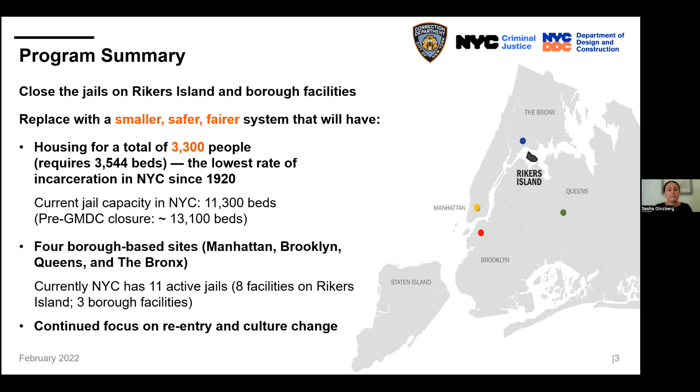And also that these facilities can be civic assets for the communities in which they're located. So now we'll zoom into specifically the Bronx site and what's happening with this particular project.

The RFQ, the request for qualifications to find the design build team to do the site preparation work, was released in October of 2020. Then we released the RFP to narrow our selection down to one design build team in March of 2021. That design build team, who is here with us tonight, Yonkers Contracting Company, received their notice to proceed in December of last year, so they've just recently kicked off.

The RFQ to find the design build team for the future contract, the new facility that will be constructed, is actually part of a separate contract.

That RFQ went out in September of this past year, and the RFP, the request for proposals, to narrow down the selection to one design build team, will be going out in the third quarter of 2022. We do expect that the selected design build team for the new construction will receive their notice to proceed in the fourth quarter of 2023.

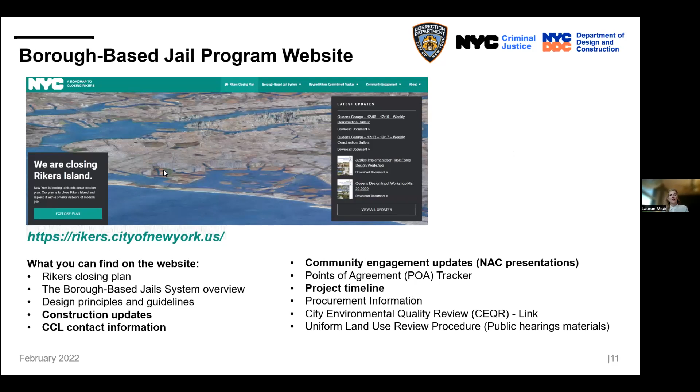The CCL contact information will be available as soon as that's updated and the person has started. At this point, I will hand it over to Glenn from Yonkers Contracting Company.

This is, again, the design builder who has the contract to do the site preparation work, separate from the new facility construction, which will happen in the future. He'll walk you through some of the key information you need to know about the process today. So with that, Glenn, I'll turn it over to you.

Thanks. All right, thank you, Lauren. My name is Glenn Olechnowich. I'm the project executive for Yonkers Contracting. On the line also is Jack Donnelly, who will be the on-site project manager for Yonkers Contracting.

What we'd like to talk about today is the project itself. We're going to go through three main items: the schedule milestones, basically when the work will take place; the site preparation and temporary sewer overview, covering the work that's going to happen on the job site; and the last item, the measures we will put in place regarding traffic, air, noise, dust, and vibration mitigation and monitoring.

So, schedule milestones: note that these dates shown are based on what we know right now and are subject to change based on permits and other outside influences. Right now we have the NYPD vacating the tow pound area in February.

Once they vacate, we'll start our site investigations, which include assessments and surveys, borings, test pits, removing trailers, and tree removal around the site. That's going to happen in the February, March timeframe. After that is completed, we'll mobilize onto the site and put in the site fencing as required.

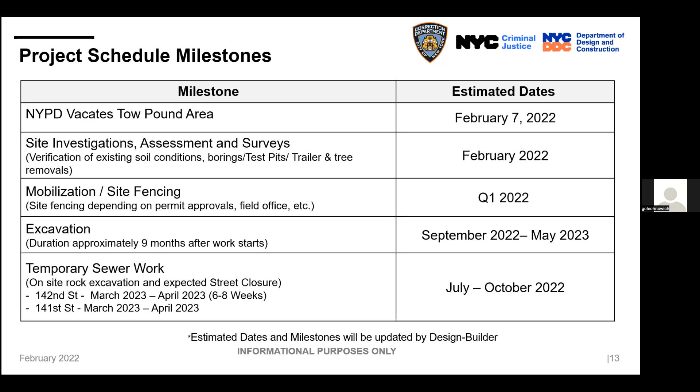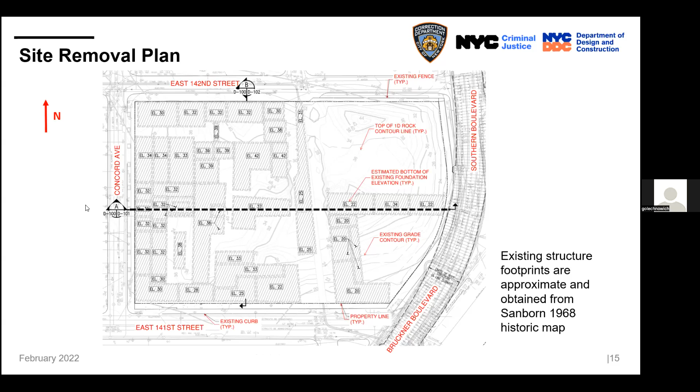This excavation includes the demolished buildings and the soil that's on site. Going through the hashed areas, those are the existing foundations we believe are going to be in place that we're going to have to demolish and also get off site. We expect there to be roughly 90,000 cubic yards of material to be taken off the site.

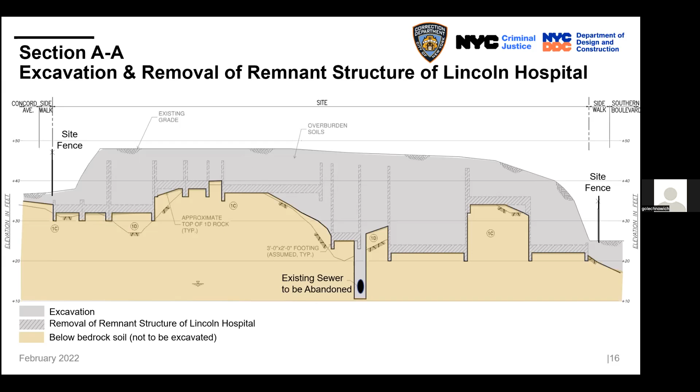So when we start the work in the site investigation, which is the first thing we'll be doing out there, as a precaution we're going to wear level 3 PPE, which is Tyvek suits, and people will have on respirators. That's to protect our workers during the initial site investigation, until we know exactly what's out there.

So there will be no issues with the public. We'll be monitoring to make sure the public's safe along with our workforce. So if you see that out there, that's just out of an abundance of caution wearing these suits. Once we identify what's out there, then we'll decide what needs to be done to protect not just our employees, but also the surrounding public.

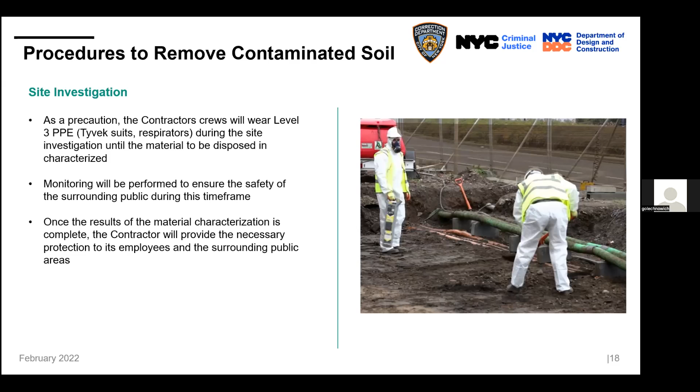We know traffic's a big issue on this site, because there's going to be 30 trucks coming in and out of that site on a daily basis when we're excavating. We're going to make sure our trucks stay to the haul route. Our trucks will, when coming off of I-87, get off exit 1, turn down onto 132nd Street, then follow all the way over to 141st, and enter the site at the southeast corner where we will create an access way. That'll be the only way people are going in and out of the site, to keep people away from the Concord Avenue residential area.

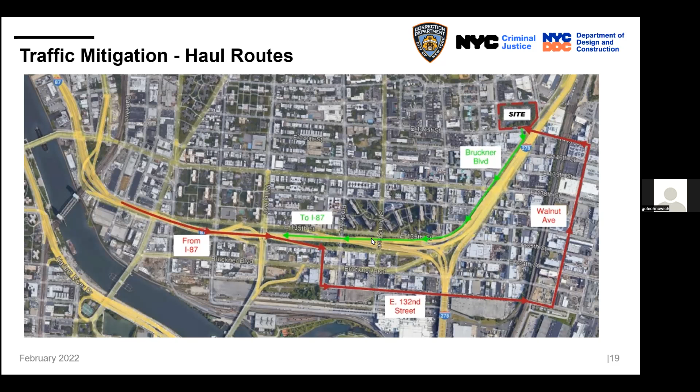So I'm going to talk about the phasing or staging on the project. I'm not going to focus on the dates, since that could be subject to change, but I'm going to talk about what each stage looks like and what's going to be done in each stage.

So the pre-construction phase, the main goals are really, like I discussed before, to identify the soil material. That'll be done through borings and test pits, inside the site and also outside the site, mostly along the sidewalk. During this work, there will be short-term sidewalk closures and parking restrictions in the areas we will work.

We'll work in one area and work our way around the site, so it won't be full closures or full parking restrictions, just partial. We'll also demo the existing trailers that are on site that the NYPD has, and we'll install measures to keep all of the stormwater on site during excavation.

So stage one, this is when the actual work gets started. Before we do anything, we're going to make sure we install all our noise, dust, and vibration monitoring. These are all engineered devices to protect our workers and also the surrounding public.

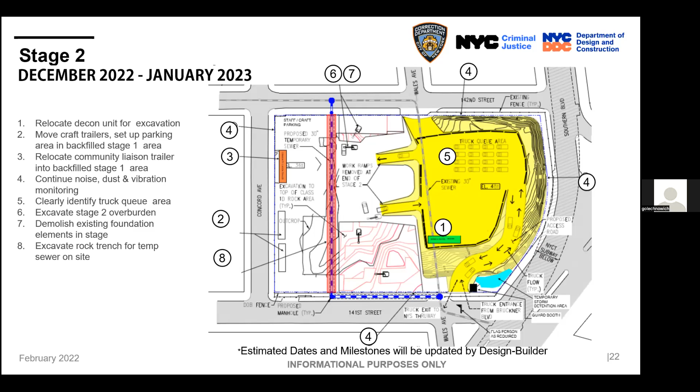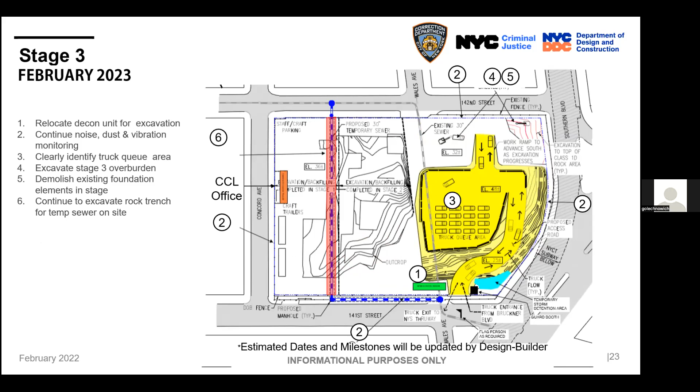Stage 3, again we're going to continue working east, and we're going to excavate the site out and the building material, and then continue to excavate the rock trench for the temporary sewer. Stage 4, the last stage for the excavation, we'll finish the site excavation and complete the rock excavation for the temporary sewer.

And up on the top of the screen, number 6, we're going to start the temporary sewer work on 142nd Street. This is going to require a detour of 142nd Street between Wales and Concord Ave, so we will detour that area.

The pedestrians will be able to go on the north sidewalk on 142nd, but the south sidewalk will be closed and the roadway will be closed. We will work with the DOT to put together plans for detours.

On 141st Street on the south side of the project, a sewer is going in close to the existing property line. So we will reroute pedestrians outside of our work zone out into the street, but we'll have barriers to protect them so they can walk safely in that area.

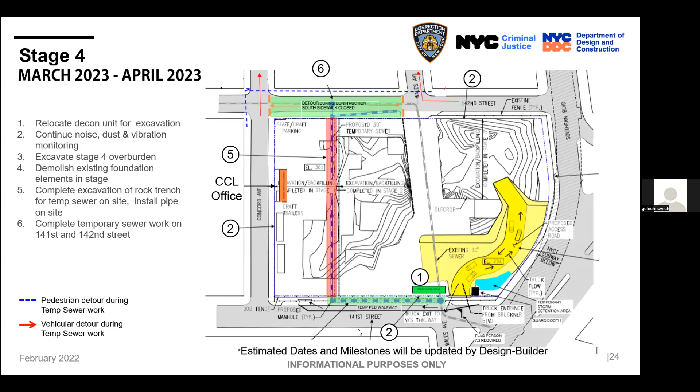There's enough room to have two-way traffic on 141st Street and also have parking along 141st Street on the south side. So all of the sewer work will be completed in that stage.

So in the substantial completion stage, which is stage 5, we'll be repairing all of the street, restoring any pavement that was damaged or any sidewalks that are damaged. And we'll be retiring the existing sewer that runs through the site and put the new temporary sewer into service.

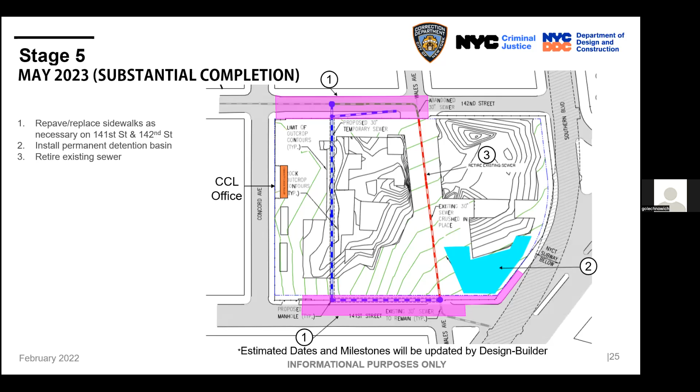Last, we will demobilize from the site. The community liaison will stay on site, and we will create a permanent detention basin for runoff, if there's a lag in between projects, as a place for the runoff to go, be treated, and put off site as required.

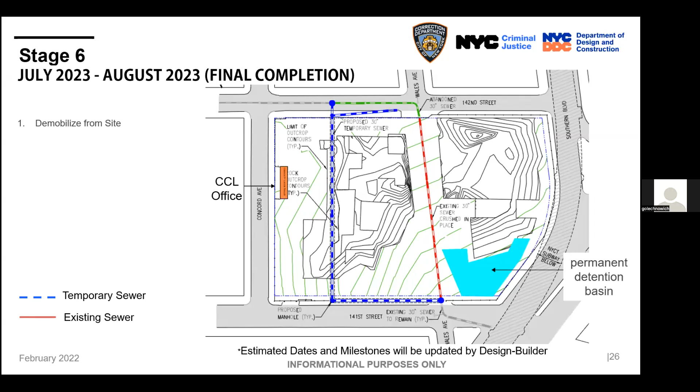The other thing we want to talk about is the measures we're going to take to mitigate traffic, dust, noise, and vibrations. All construction vehicles, personnel vehicles, and trucks will be staged on site at all times. The site is big enough to house all of the vehicles, so we will not have any on the surrounding public streets. We're going to create a single entrance for construction vehicles at the southeast corner of the site, at 141st and Bruckner, to keep construction vehicles away from the residential areas.

We will have real-time air quality monitoring throughout the project. Whenever we're working, we'll be monitoring the air quality, and this will be real time, so we'll know what we're getting at all times.

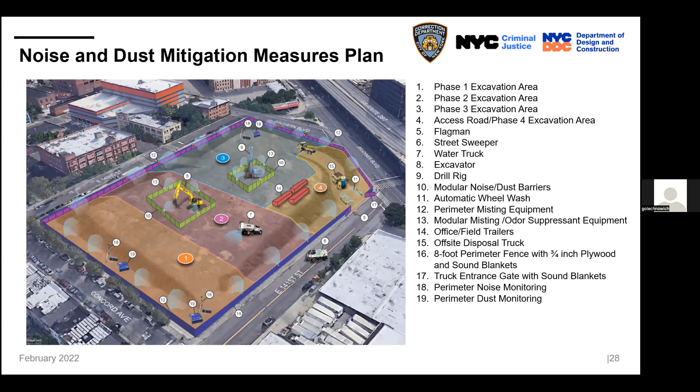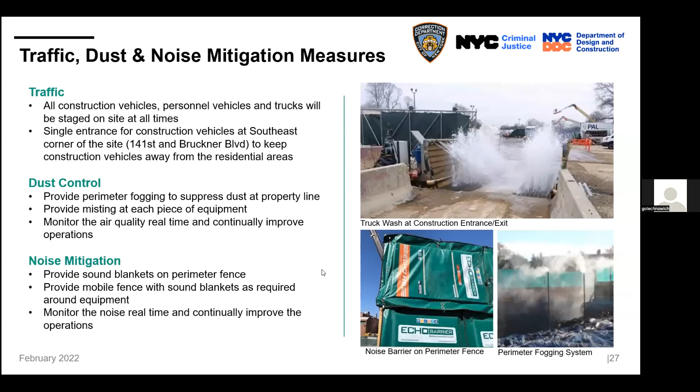It's going to be short term, we have a couple of weeks of doing borings along that area. So that side of the street will be taking the sidewalk, and we'll have to limit parking as we work our way down the street. We won't have to take the entire street parking and sidewalk, probably most of the sidewalk, but for parking we'll be able to have some out there, just not all of it. Glenn, do you mean the east side of the street? Oh sorry, you're right, east side. Does that answer the question?

Thanks, Glenn, thanks for the information. The next question is also for you. How is vermin going to be controlled? As the community has seen with other projects in this area, when construction starts it kind of creates a migration of rats. What are you and your team going to do about that?

Great question. We have a rodent control process that's going to be in place. We're going to set up to 100 traps throughout the site, and we have a subcontractor who will take care of that. This process gets approved by the DDC, but we do have a process that will control the rodents in the area.

Okay, thank you. Next question: can you explain again why we are doing the site preparation and demolition from west to east, and not the other way around? Okay, that's actually another good question.

So this is a twofold reason. One is because we created our site access on the east side of the project to keep all of our construction equipment away from the residential area. We want to keep this area up on top on the east side to queue trucks and for staff parking, and work our way out. The longer we have the pavement up there, the better it is for keeping the trucks up on top, so we want to use that area to queue the trucks.

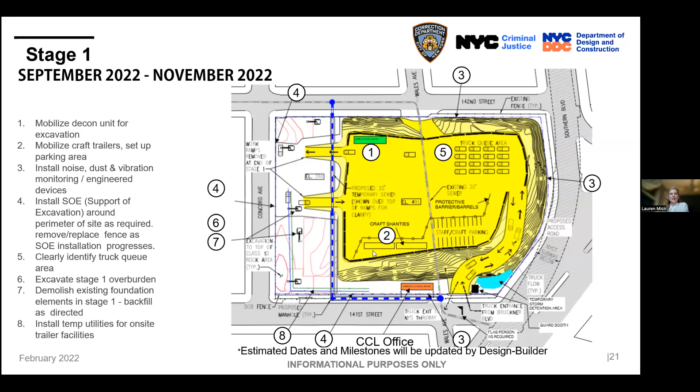That's another good question. Let me flip back to our community resources slide. We have a lot of resources available during construction, including e-notifications. When events are about to start, we'll issue 72-hour advisories in advance of any construction activities happening on site, in addition to more regular reports and weekly bulletins for anything imminent.

Those advisories will go out on the neighborhood notification list. I think everyone here as part of the NAC is already on that list, but if you're not receiving notifications, please put your contact information in the chat or let us know, and we can add folks, or if you have neighbors or friends who need to be added, just let us know. That's how we'll keep the community posted.

We'll also be issuing quarterly monitoring reports for the air, noise, and vibration quality monitoring that Glenn walked us through, so the community will have a record of what's happening on site and what's been found.

Also, on the note that community board attendance is rather low - we recognize that. Our community construction liaison is a day-to-day contact; the office will be close to the construction site. He's going to be going around, knocking on doors, meeting local businesses, talking with people - a real great day-to-day contact. So there's a bunch of different touch points we'll have with the community to keep people informed about what's going on.

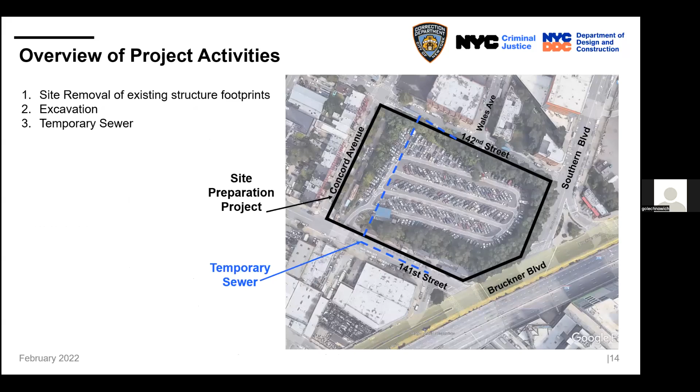Yeah, so like I said before, the material is mostly building debris mixed with soil. When we do our site validation, we go through and try to figure out what it is and characterize it - that'll determine what level of contaminants, if any, is in it and where it needs to go. We believe most of the stuff will end up in New Jersey or Pennsylvania, but that really depends on the actual results from our material classification.

All right, thanks. I think there's just one more question in the chat, and then we'll go to folks who have their hands up. Glenn, are any trees being removed or replaced? What's happening with street trees as part of this project?

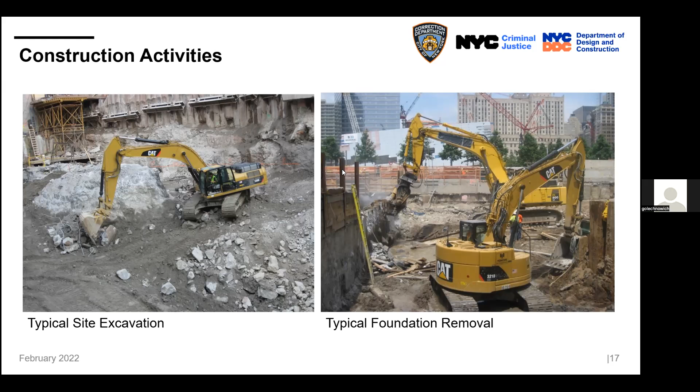The trees along Concord on the sidewalk - nothing will happen to those. We might prune them; we've been talking with the Parks Department. But the trees in the existing fence right now, all of those will be removed.

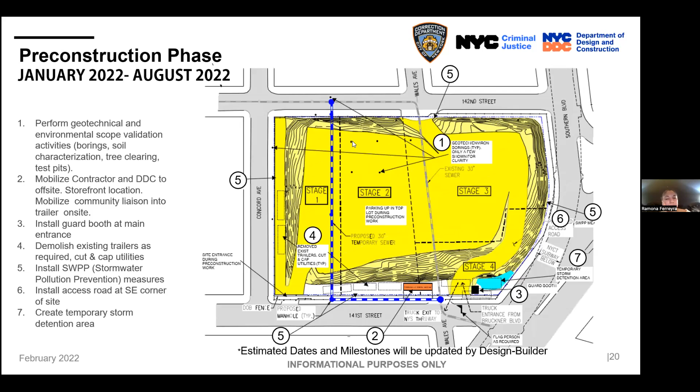Hi everyone. The questions I'm asking are really a result of the failures we had as a team in the beginning in not engaging the community and not being transparent enough with the community. So as this phase starts, which is really exciting and I can't wait to see it start, I really want to stress my concerns with the outreach plan and discuss how we can be better at that this time.

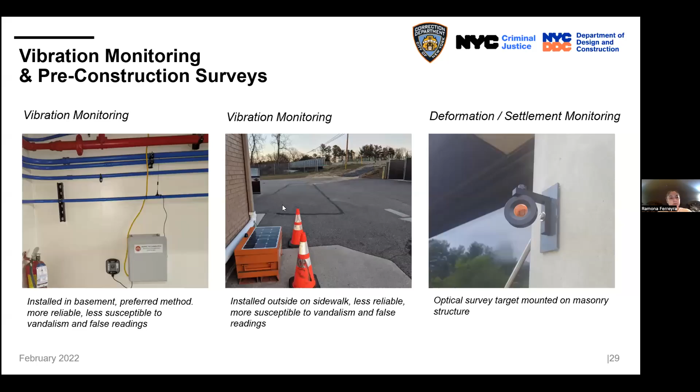Just reminding folks that are not from the community of the kind of people you're going to be engaging in Mott Haven: not everybody has internet connectivity, not everyone is comfortable navigating city agency websites. These are all going to be challenges and obstacles that I see. If you want to go back to the slide for the outreach plan - I know we're going to have a liaison, but phase one, if I'm correct, is starting pretty soon in March. Is that person already onboarded?

The community construction liaison will be starting on the 14th of this month. Okay, that's next week, right? If I can keep track of the days. Yeah, so that's next week.

So I really am hoping that you guys will come up with an outreach campaign that really reflects this community and how this community absorbs information. We're really big on flyers, local newspapers, TV and radio. We're not digital.

So in order to make yourself accessible, I think we need to focus more on traditional ways of communicating with the public, and possibly have that liaison set up on site and also throughout the neighborhood. I'm wondering if there could be a central location on the construction site, not inside where they'll get hurt, but if there's a spot on the actual paneling that will surround the construction, that will give these updates and provide information on the phases and the timing at which each phase is going to start.